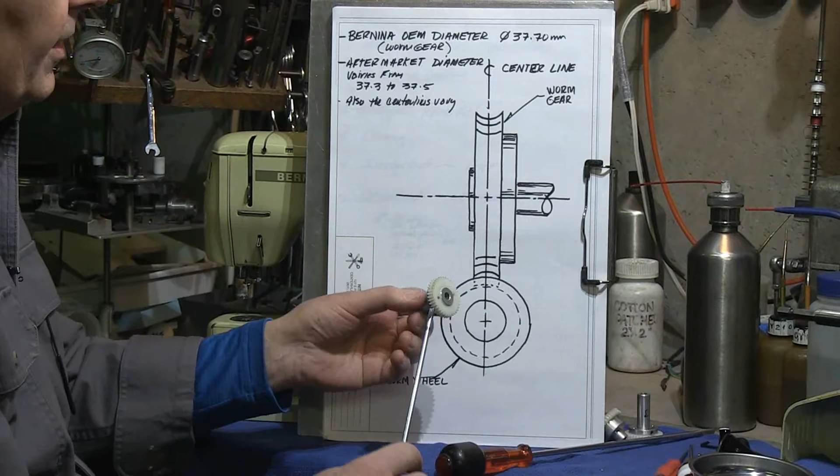Look at the actual measurement on this gear. If we were to take a caliper, a digital or a dial caliper, and measure from the inside radius of the profile on the cam, we're going to come up with a dimension. The dimension for a Bernina OEM diameter using a typical digital caliper, it's not a real accurate measure, but it's accurate enough, is going to show you that it's going to indicate 37.7 millimeters.

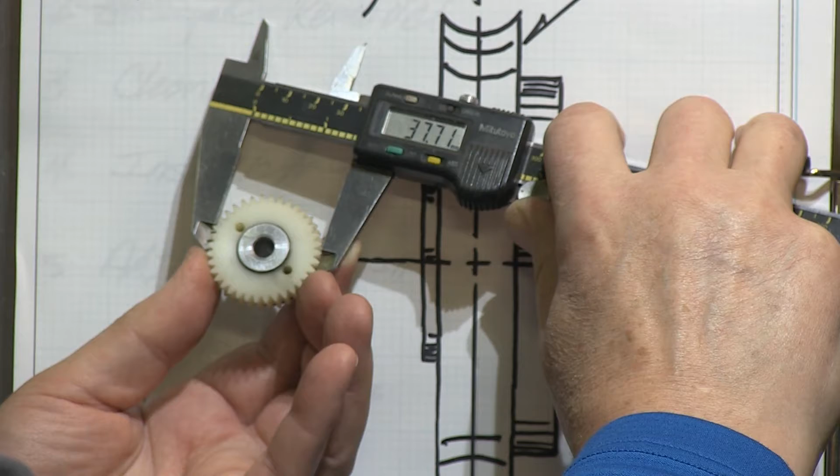If we were to look and measure at some of these other Camstacks, we're going to find that the dimensional measure from here to here is going to range from 37.3 to 37.5 millimeters. This means that when this Camstack is installed, that whole Camstack is going to roll a little bit left and a little bit right.

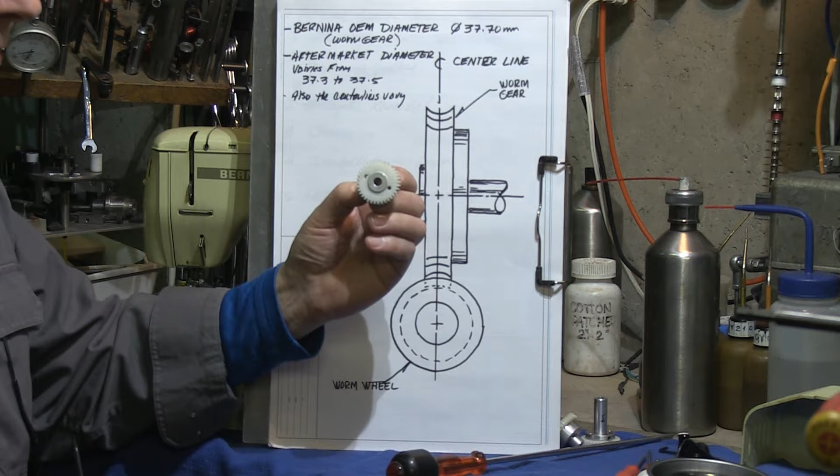The problem with that is that under normal running conditions, when the stylus is ascending the cam, there's a force in the opposite direction against that stylus, and then when that stylus starts to descend off of that lobe, that whole Camstack is going to jump, and then you're going to get a knock in the machine, and you're also going to get a glitch in the actual form of the automatic pattern.

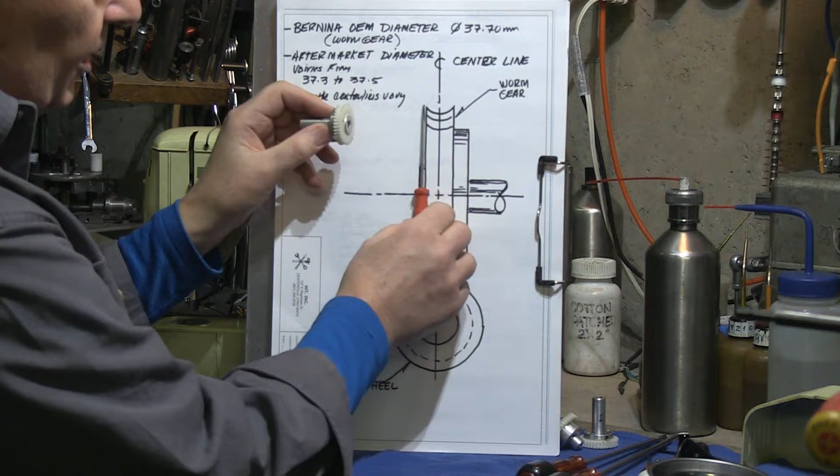Something to watch for as well is the actual profile right here of this Camstack gear. On a lot of the cams that I've seen, or a lot of the Camstack gears, I found that this profile is shifted to the left, which means that the gear is actually going to favor one side of the worm wheel. That can become an issue where that is very, very tight.

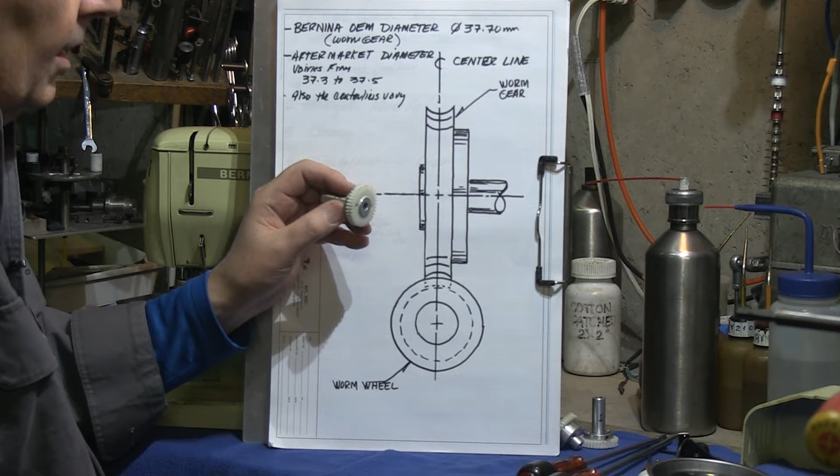I've seen the opposite, where that profile is shifted to the right, and then it can also become very, very tight. That isn't going to work. And one of the reasons it won't work is, of course, obviously, it's going to bind the machine. But sometimes if we have too small a diameter, when it's actually on center, then we actually have too much play, so the Camstack will not work well. It functions, but it won't work well.

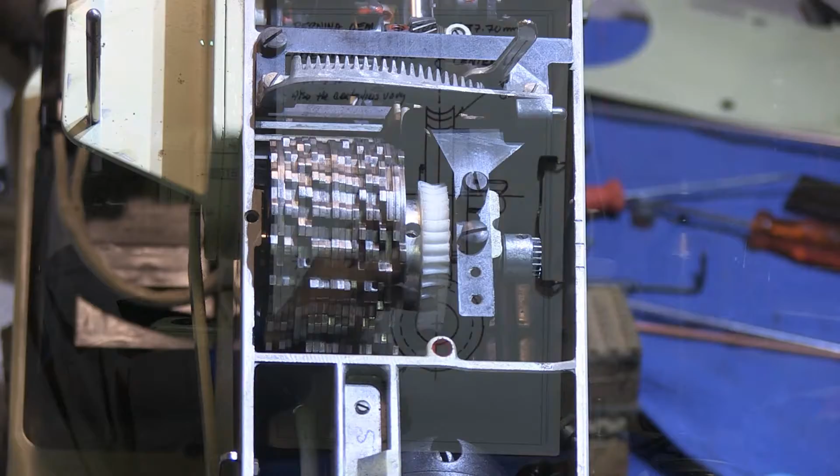To make this a little easier, I've already chipped away the gear on the Camstack, but to tell you how this works, I would simply, when you find the crack on this side, turn the hand wheel so the Camstack rolls to the opposite side where the crack is going to be, and it will always be where one of these holes lines up.

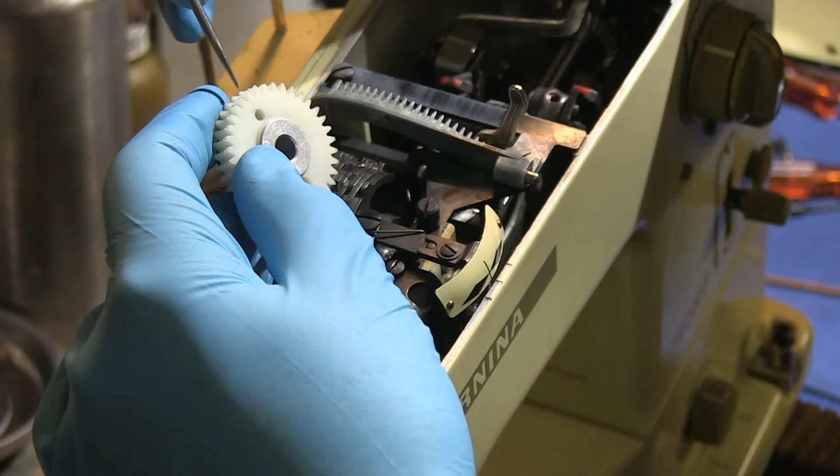Put a screwdriver in there and then just whack it lightly, and it will actually chip that gear apart. You remove both halves, and then the Camstack will be able to spin like this.

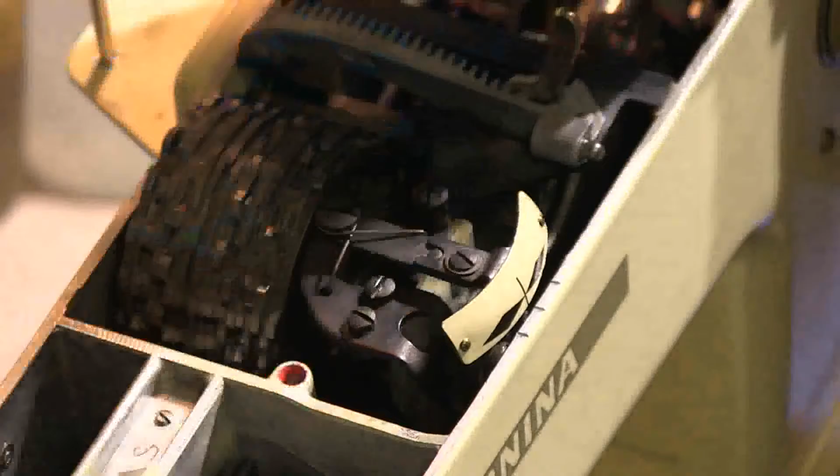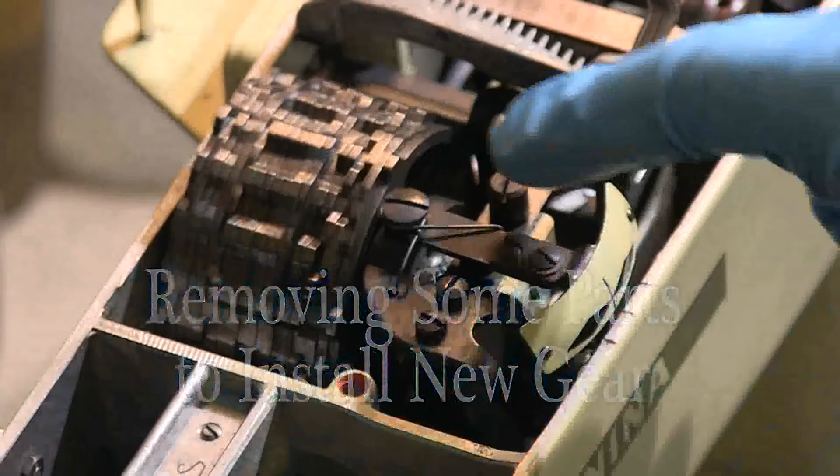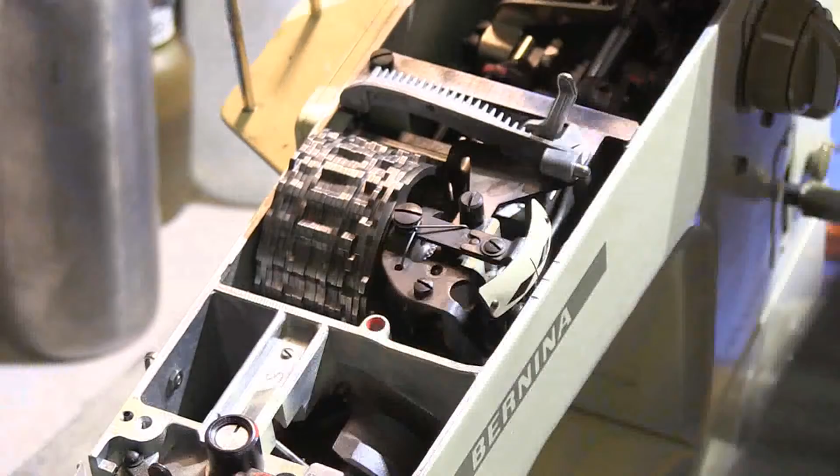Now, we're going to go ahead and start to remove parts, and we'll show you how to correctly do that without damaging the frame of the machine or the bearing post right here. So, we can loosen the two screws on the pattern indicator, remove those, and take the pattern indicator down.

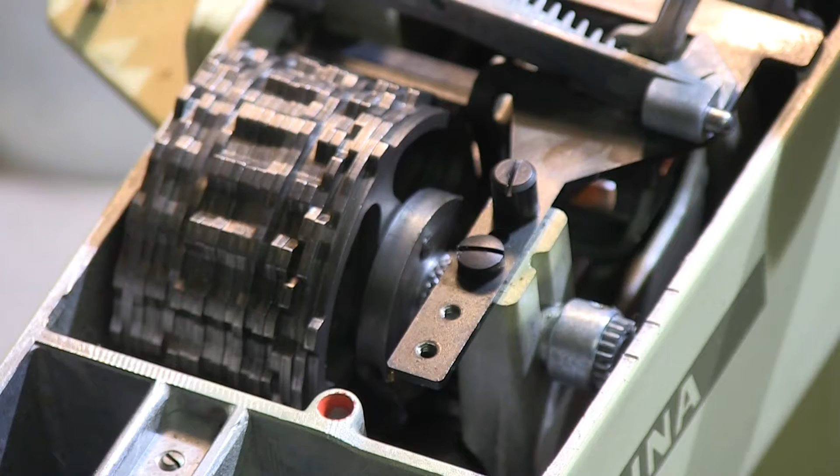Now, just to let you know, I usually use lacquer thinner to clean oil and so forth off screws. You do not want to take the pattern indicator and drop it in lacquer thinner. You won't have any paint left on that indicator at all.

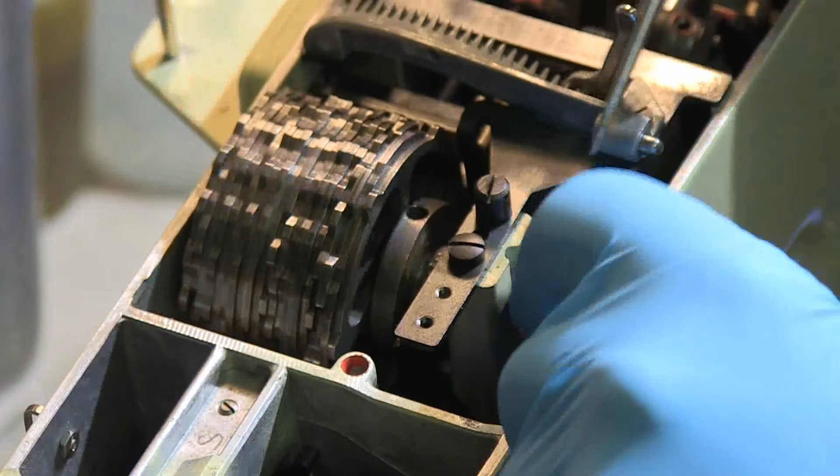Now, in order to remove the Camstack, the easiest way to do this, of course, is to take the screw in the Camstack. We want to loosen it. Then we'll go to the spur gear, and we'll loosen this gear here. We'll take the second screw and loosen it. And now we'll slide that gear out just a little ways, take one of the screws and screw it back in.

What you do not want to do is pry that axle out. By doing that, you can force the camstack over and it will jam in, especially if you left the gear in instead of slipping the gear out. If you left the gear in, it will wedge itself, and you can damage the frame by prying too hard. So what I do here is simply jam the camstack like this, and then we can push that camstack axle out, and remove the spur gear.

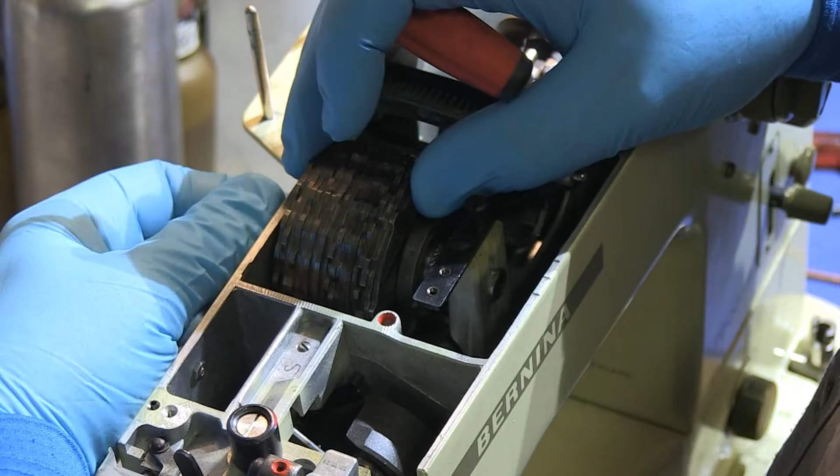We can move it further out. What we don't want to do is have the camstack slide axially back toward the back of the machine. Once that's done, we can wiggle the axle out. The axle is going to have a lot of oil varnish on it, so we'll want to remove that. Once we pull the axle out, we're going to want to clean it in lacquer thinner.

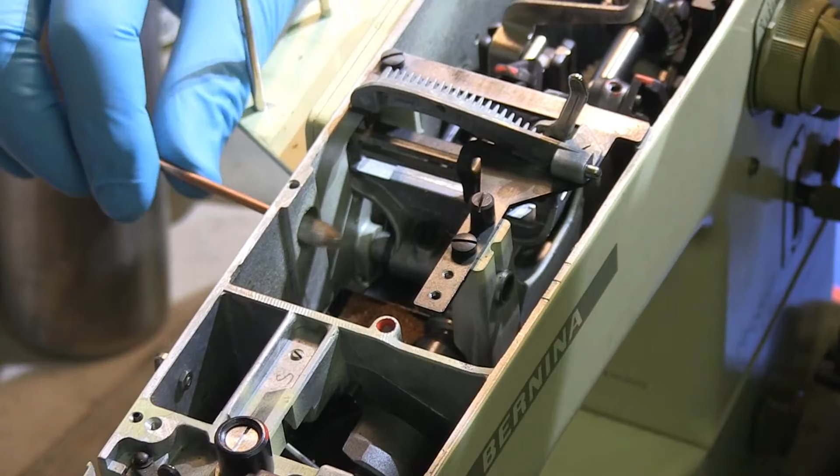We'll also want to take a moistened Q-tip. Here I've made some Q-tips on steel shafts, and we'll want to go in here and clean all the oil varnish out of the bore, the large bore, and then all the way through, and clean this bore.

Once that's done, we'll want to go into the machine, and you'll have an oil pad that at this point is going to be worthless because the foam is gone. What I'm going to do is remove that entire oil pad. It isn't necessary to have in there anyway. So that goes in the trash.

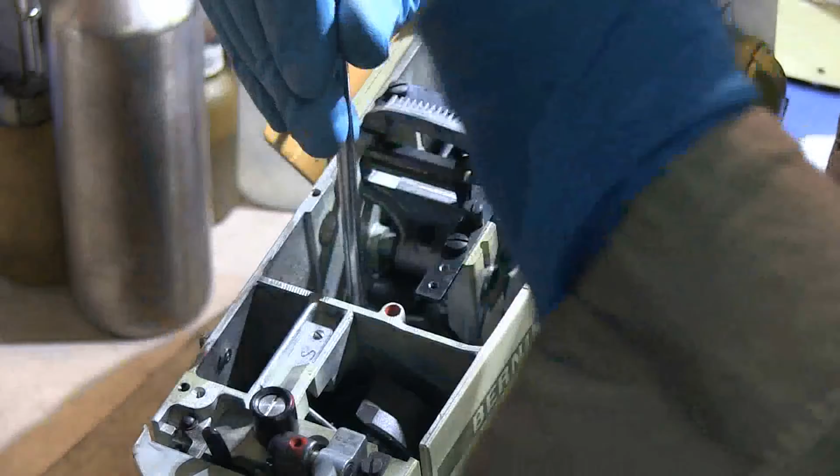Put the screw back in place. The reason I do that is you can have some oil collect in there, especially if the machine gets over-lubricated, and have it drip down underneath on the open arm. And we'll clean that out.

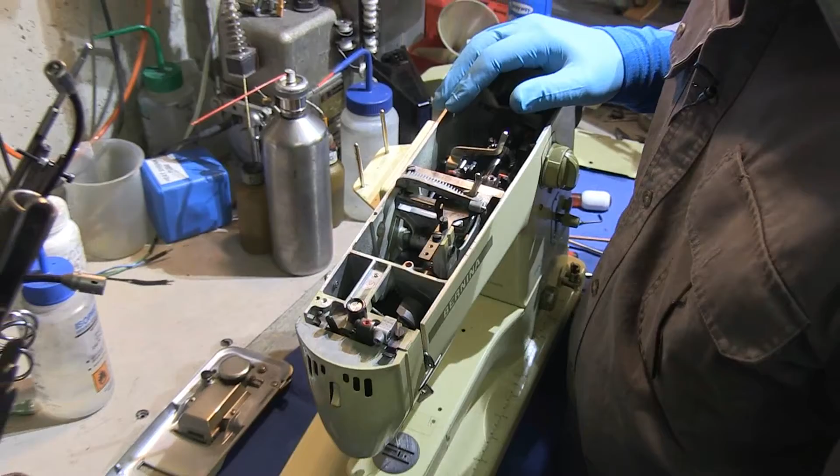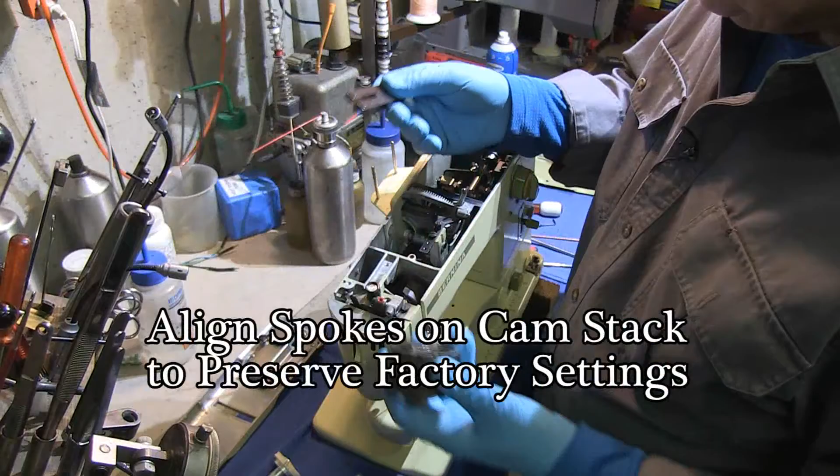Now we're going to change the cam on the camstack. We'll show how that is done using a vise, and also a special tool, which is a Bernina tool. What it does is align the spokes. So if you have this tool and you don't have a vise, use the tool. You can slide the tool down the spokes like this.

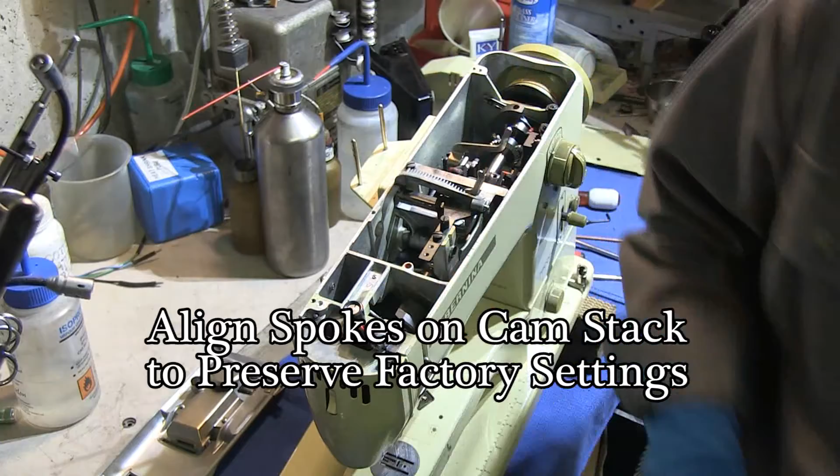In this case, it's a little tight, which tells me that maybe these screws have been loosened a little bit on the camstack itself. So we'll loosen those slightly, and then we'll force this down in.

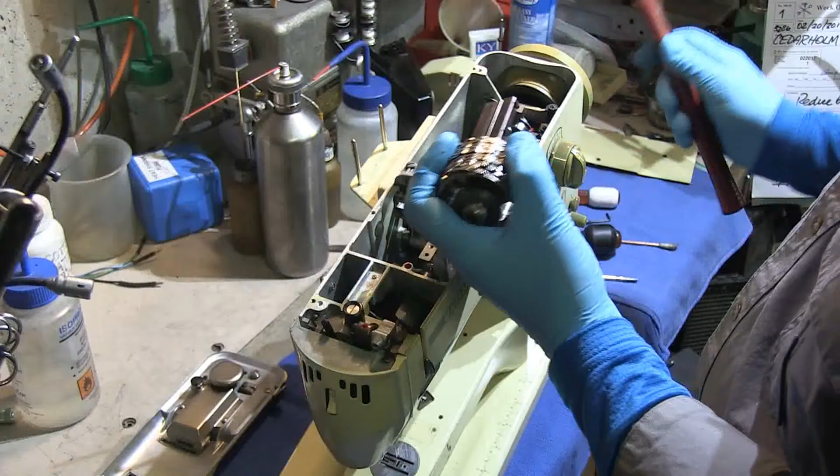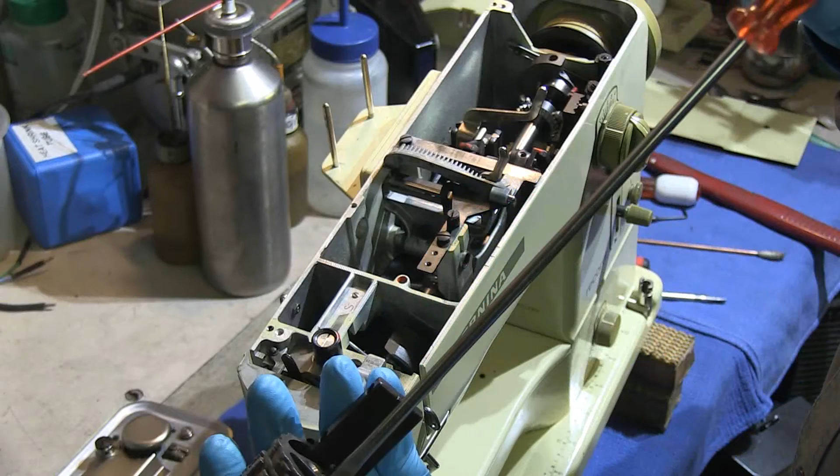At this point, we can remove the screws. And we could put a number 4 Maxbauman screwdriver in the old camstack, and we can then simply knock it out of place like this. My favorite thing to do, however, is not to do that at all. Because I have good vises in my shop, I use a vise to simply pinch the camstack tight. I can put this in there if I want, but I can pinch the camstack tight, remove the old camstack, and then put the new one in without ever having to worry about losing my factory settings on the camstack.

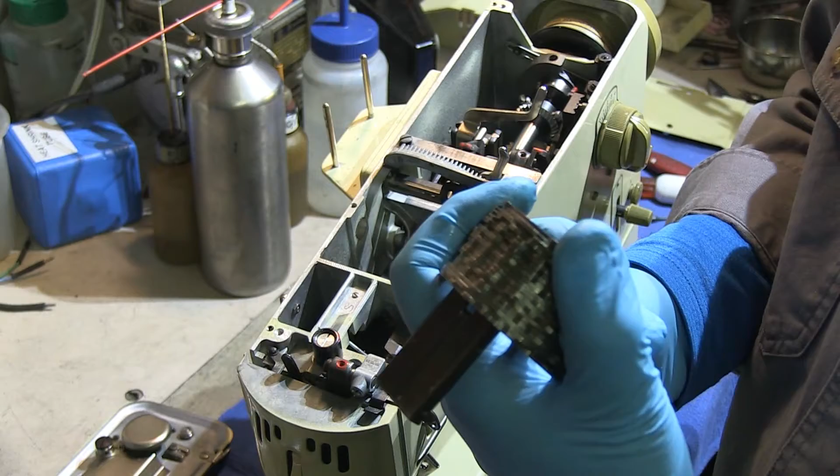It's important to note that these cams can be slightly rotated, and it will throw off the lateral movement, and you'll have a variance from one pattern to the next.

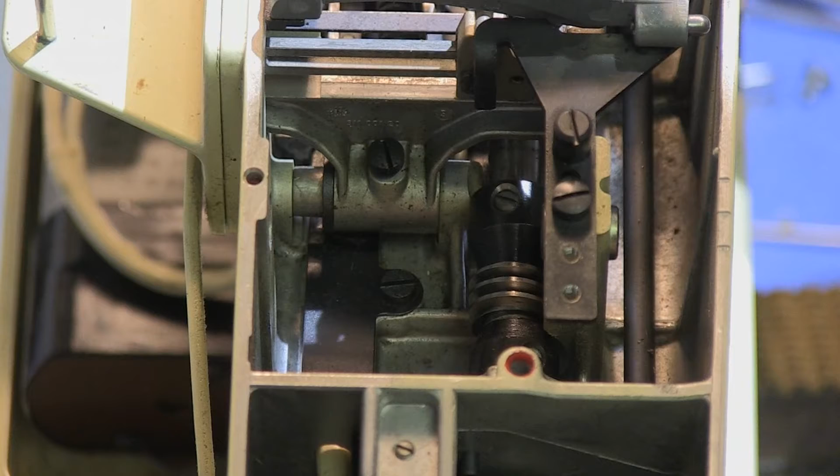The next thing we want to discuss is a problem with oil varnish in these older machines, because it's the biggest single problem we have with older Bernina machines. Machines that haven't been run for a long time because they had a broken camstack or a broken vertical shaft gear, like this one has, these machines can get stiffer and stiffer.

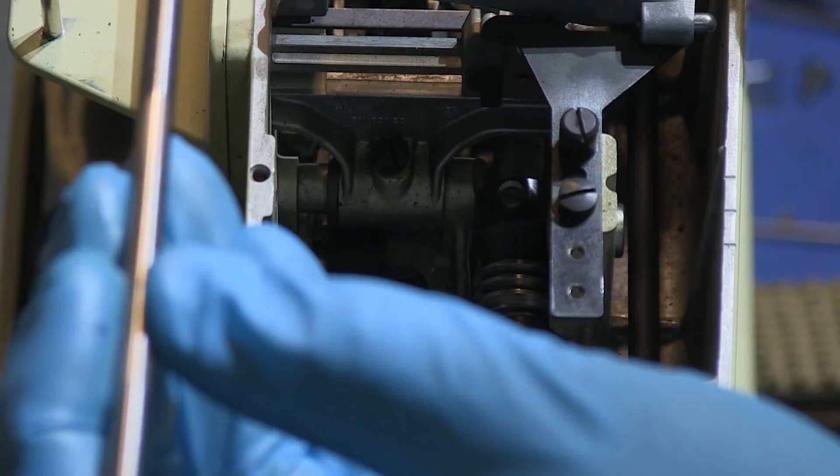What I've done is made a special tool with a 5mm screw thread on one side, and a very fine pitch 5mm on the other side, which is the same screw dimension as the worm wheel. What I'm going to do now is use a little bit of lacquer thinner. We'll put it in the hole.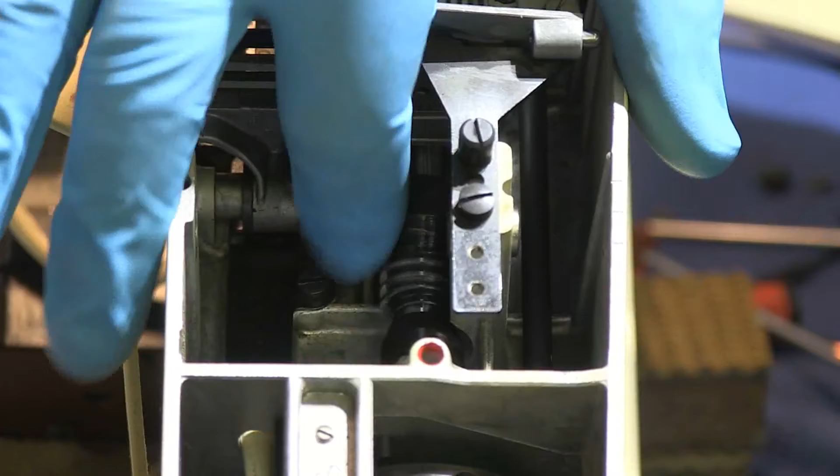I'll want to be able to roll that gear back and forth without any difficulty. Make sure I clean all the varnishes off so that it's just like a brand new machine. It will roll beautifully and I'll be able to make the adjustment easily.

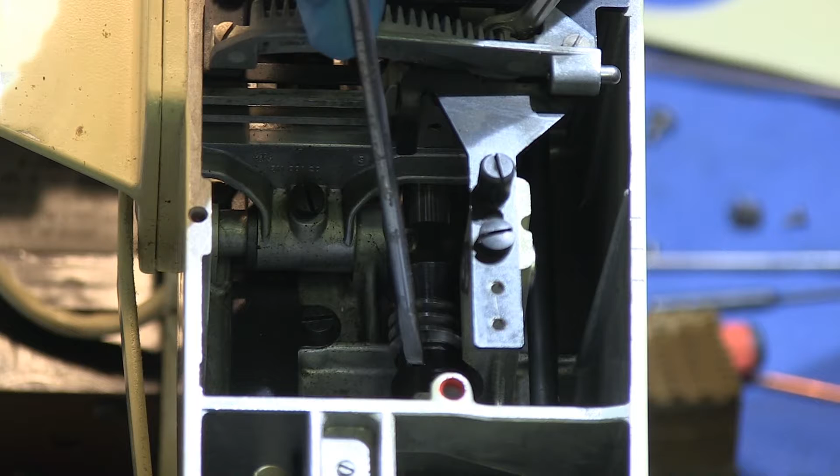Make sure that this gear has been slid all the way against the thrust collar. It's important that gear is against the thrust collar. That gives the worm screw the center line of this shaft. This thrust collar is made axially to a specific length to space that out so that the relationship of the worm wheel to the center line of the camstack is right on the money.

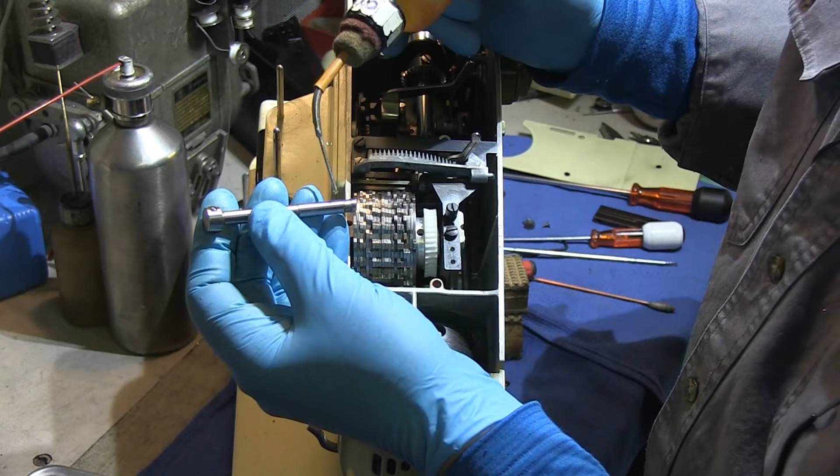Now we're going to install the camstack. Screw up, as mentioned, like so. We're going to take the axle and just lightly moisten it here, using Kluber UH168. All we want to do is put a very, very small coat of lubricant there.

We'll now install the camstack axle all the way through. Now when we push this all the way in, we know that this camstack, the gear itself, is now undersized because this is what we've measured. This is one of these.

Now watch how much play we've actually got here on that camstack. That's not really too bad. I'd prefer to have it tighter than that, but that's the way it is.

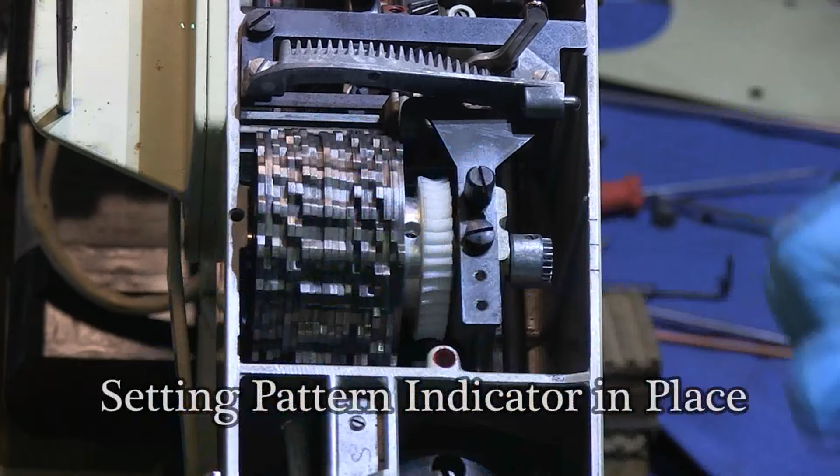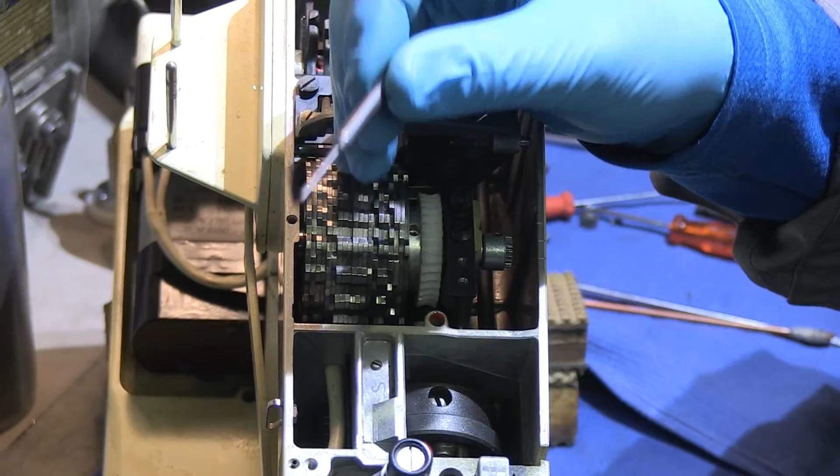Now that that's done, we're going to set the pattern indicator in place. For those of you who are Bernina dealers, you've probably wondered what this little tool was for. This is made just for the 730 machine, and on the late model 730s, from 1967 on, the camstack pattern indicator had a hole in the gear here, and it also had a hole through the frame. So what we can do is roll that gear and then install the tool, aligning the gear with the frame. It gives us a little handle to then set this device in place. We'll go ahead and set the screws on it.

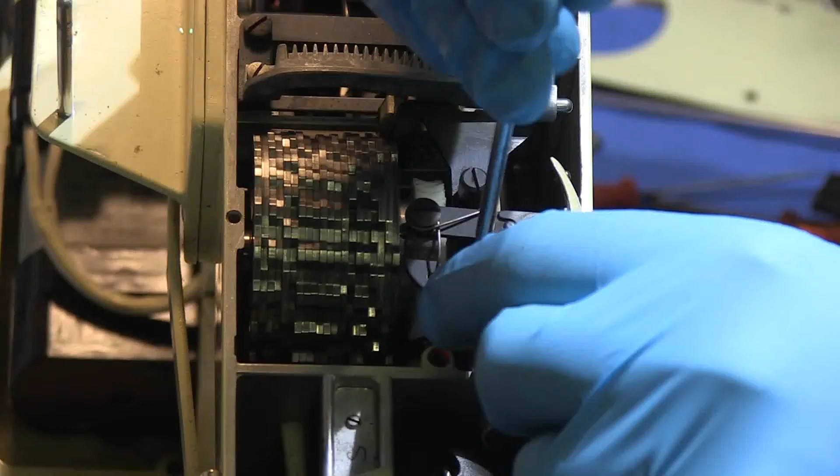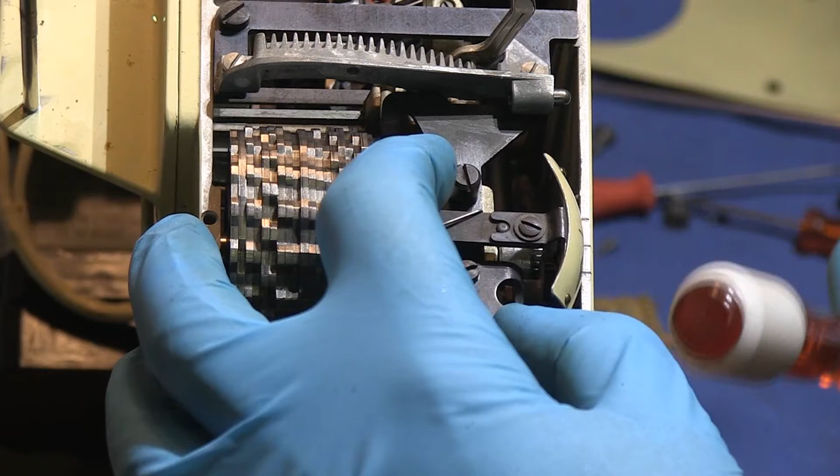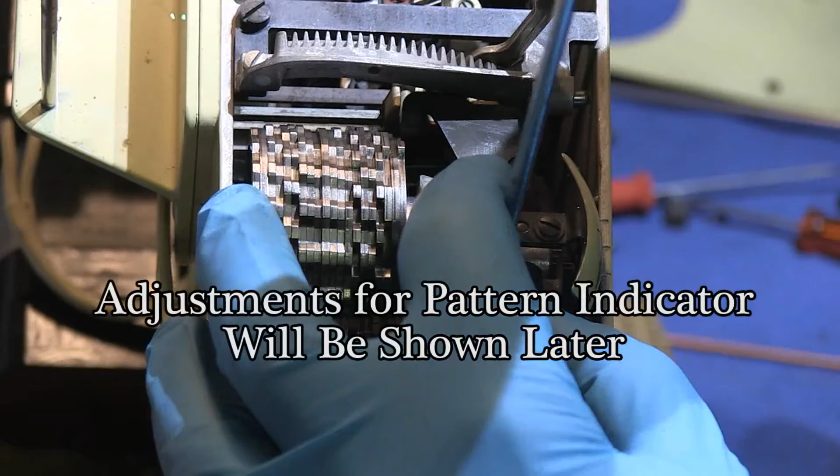When I set this in place, I want to make sure this indicator mount has the gears parallel and pushed in so that it's not real hard, but I don't want any play in them either. Set our screws, then remove the indicator tool. Don't worry about this right now, we'll adjust that later.

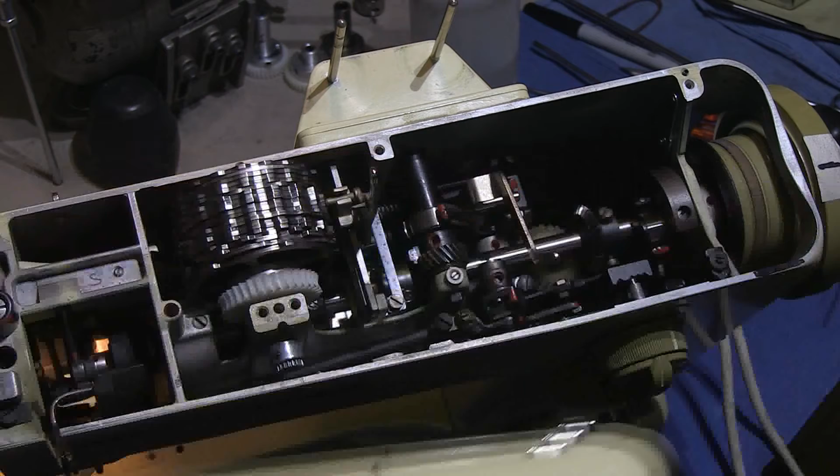What I've done now is selected the middle cam, about the middle - it's actually not quite at the middle. I'll show you the pattern I'm going to use. The pattern comes all the way down to the right side in the needle plate, and then the beginning of the pattern - this is where pattern indication comes in handy - is when the needle moves to the left side. So you can see here we're coming from the right side. Watch how that needle bar functions.

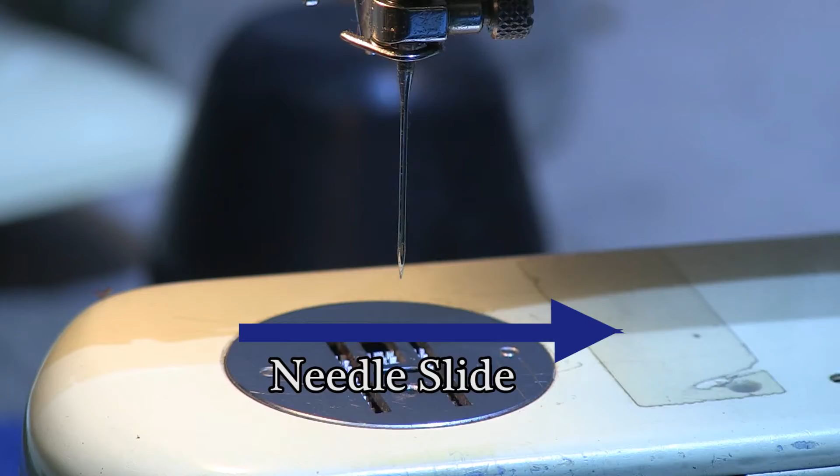If I turn it backwards, you can see how it's sliding this way. Okay, so we know the parabola is off. That is to say, the parabolic movement of the needle bar - instead of moving and changing at the top at the parabola - we are actually sliding sideways this way. We're going to stitch in and then slide back this way. So we want to time that so we have the correct parabolic movement.

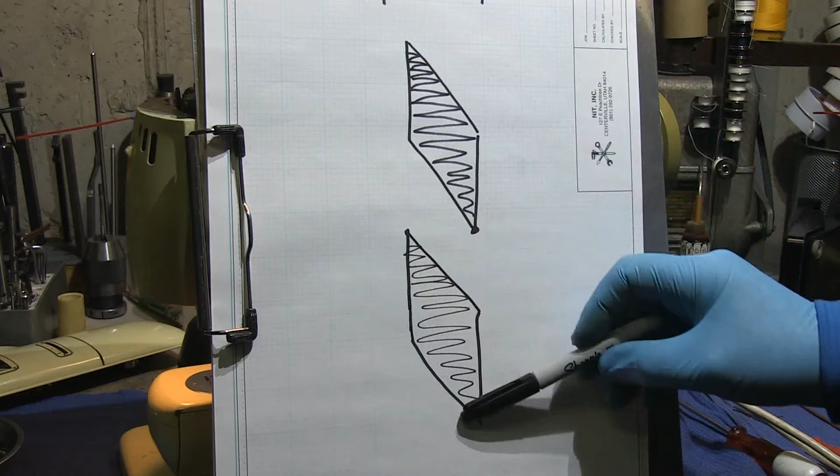Right here I'm using this particular pattern. We have 36 stitches per pattern, and we're going to start here, move to the right side of the needle plate, then the needle is going to jump over to the left side. This is where pattern indication begins. So what we want to do is check the stitch hole - I'm going to draw the stitch hole like this. So that's really what we're looking at.

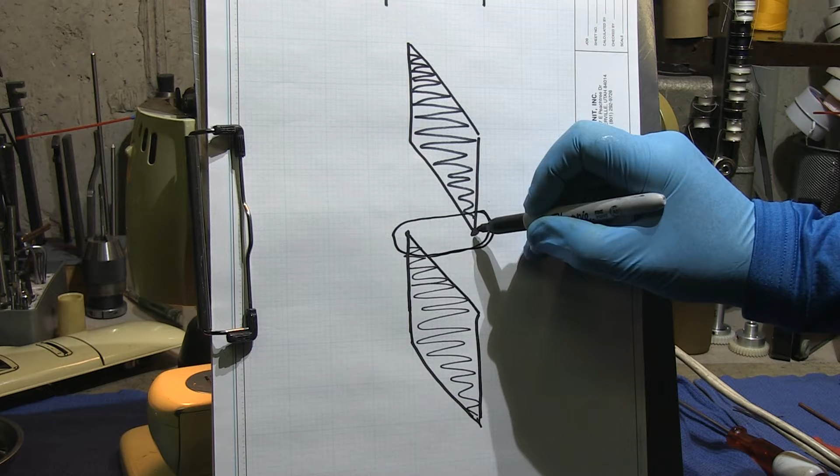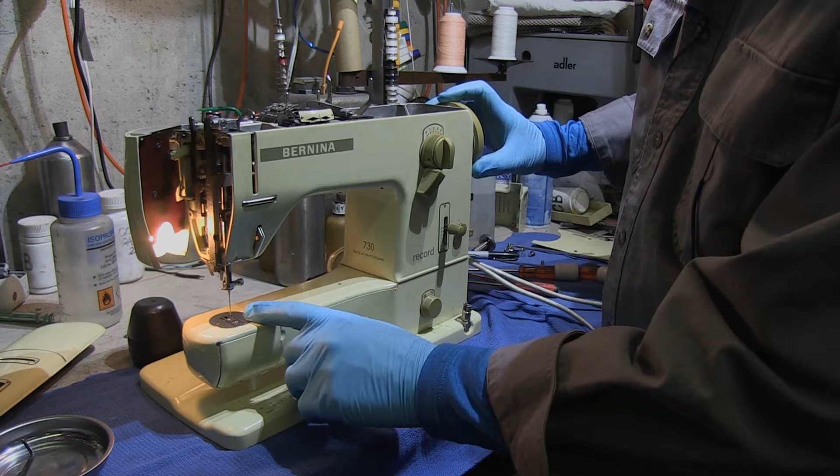We're going to adjust the machine so we have the correct parabola - direction changes like this and then down like this. We don't want the needle moving like this and having the parabola over here or over here. We want it centered. You can see where the needle is now changing from far right to far left. What we'll do now is back that needle up to the top here, top dead center. Make sure needle position is on center, and make sure stitch width is now at 0.

We're going to put our thumb on the needle bar screw, and we'll find the highest position of the needle bar. At this point, if it were set properly so the parabola was at top dead center, turning the stitch width here wouldn't cause any movement of the needle. But you can see how my needle is moving to the left.

So what I do is use the corner of the frame of the machine as a reference. You can also put a piece of tape and make a mark. I use my thumb in the corner of the frame, and as I move this back and forth, I can rotate in the direction of machine rotation, and you can see the movement gets worse. If we go back to the start point and rotate the opposite direction, all of a sudden the needle will almost stand still.

By loosening the set screw on the worm wheel, we can take the hand wheel and turn it back the same amount of distance from our check, then tighten the screw. And we're done. So now let's watch and see what it looks like.

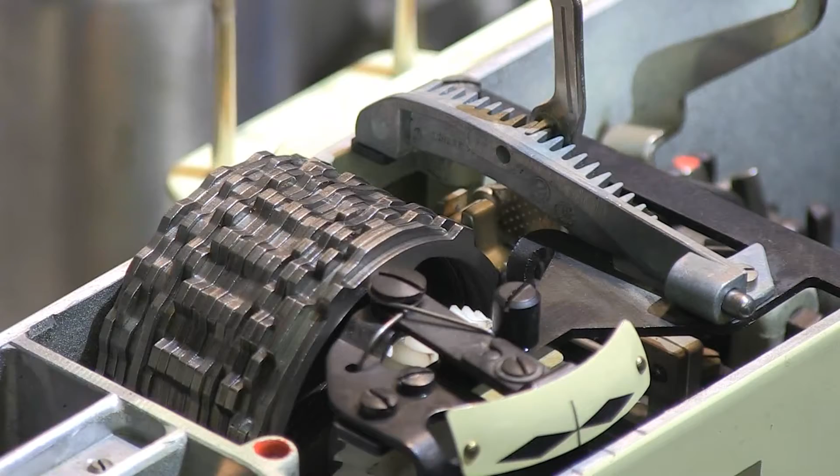Now watch what happens when I move the needle. See how the needle snaps here? If you look at the camstack, you'll also see the camstack jump. The reason it jumps is because the diameter of the gear is too small. That's the problem with this, and that's because there's too much play in this gear. The gear itself is defective, it's too small in diameter, and it makes a noise.

As you can see, it's important to make sure that you have a part that's going to work in the machine. The next thing we're going to do now is check to make sure that the parabola adjustment of the automatic device, the camstack, is synchronized with the zigzag parabola.

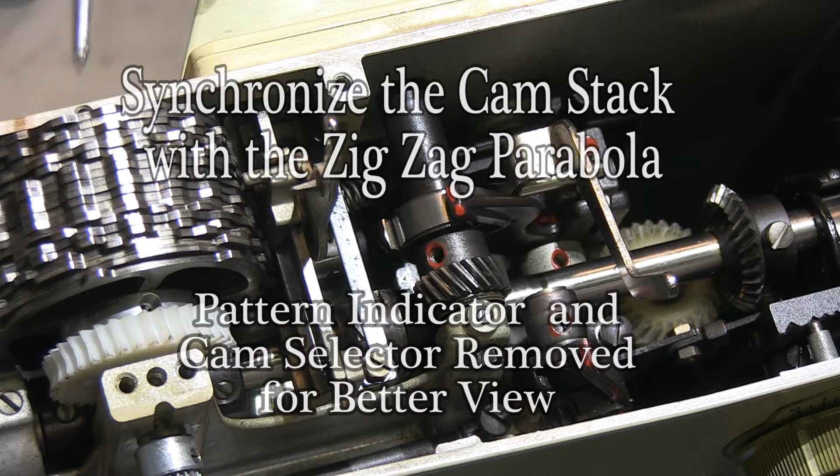It is possible between the two mechanisms to have the camstack out 180 degrees. Even though both parabolas are correct, they're not synchronized together.

When we look at how this works, on this side we have a transmission support that switches a switching pawl from the zigzag fork. When we switch it backwards, it switches into the automatic fork. Now if we put this into neutral position, you're going to see the needle bar. When we turn the stitch width up, we see the switching pawl in neutral, and we can see how the zigzag mechanism is constant and always moving.

We can also see that if I pull the cam lever back, the automatic fork moves independently. In this case, this cam is actually 180 degrees out, so here's the problem. So when we run the machine, watch the two forks.

Now here I've selected a cam that gives me a symmetric pattern back and forth like zigzag, and it'll diminish down to straight stitch. As you can see, it stalls here, then steps back up, but you can see how these are moving opposite. The problem is that when we stop sewing like this...

It is possible that these are misaligned so that when we switch this back, the switching pawl won't immediately go in. On some machines, this will actually stick and won't go in. The next thing you know, a customer complains and says something's defective with the machine. So it's important that these are synchronized.

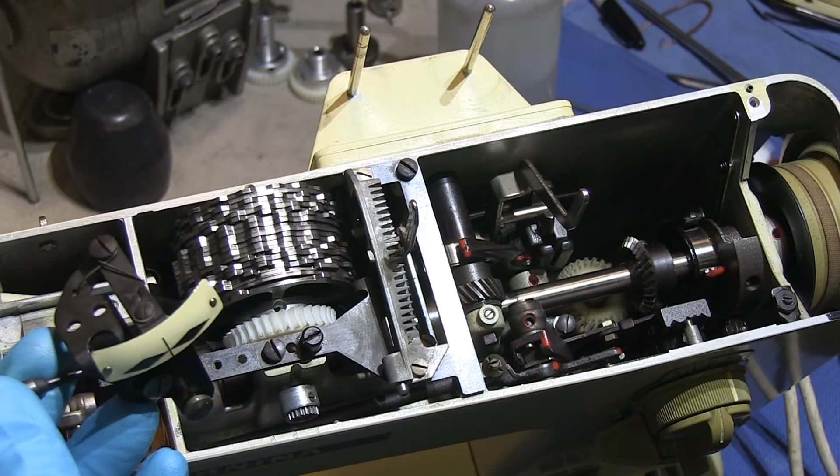The last thing we're going to do now is reinstall the pattern indicator. We removed it earlier to show you how the parallel adjustment was done on the worm gear, on the worm wheel. But now we're going to go ahead and time the pattern indicator. Most of the time when people put a Camstack in, they give no thought to the pattern indicator - they just assume it's going to be in time, and it's not. We'll show you how to do this right now.

So here we're using the adjustment tool again, or the setting tool. We're going to place this in place and put our screws in place.

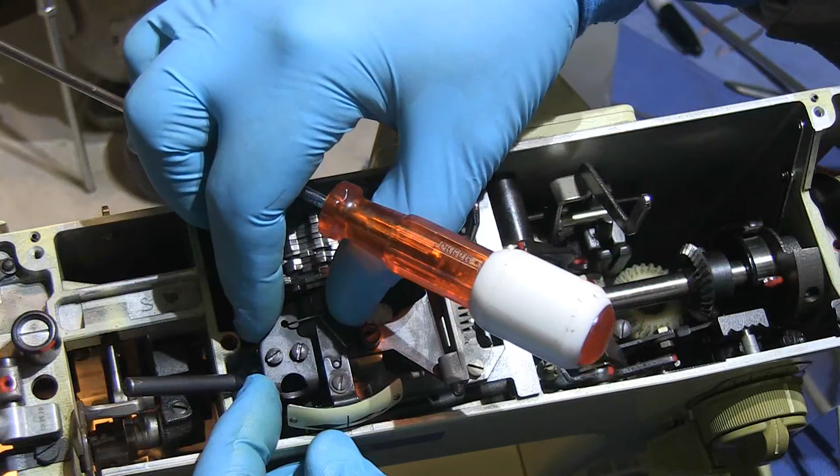Like so. We want to make sure that the indicator is adjusted so that the gears, again, are parallel. We want to make sure that we don't have play existing between the two spur gears. We'll go ahead and set the pattern indicator here and here. And I can wiggle the gear, and I don't see that I have any play.

A lot of people think that putting this in, they're finished. But let me show you why we're not finished. So we can then remove the pattern indicator. See how much play there is in this gear?

Now, in order to adjust the gear, we have set one screw at roughly 2 o'clock here, on the adjustment at the end of the Camstack axle. What we're going to do is have our needle set so that the lateral swing comes to the first stitch on the left side, because that's where pattern indication begins, as mentioned previously.

And now we can run the machine, and we can mark, if we want to, where that pattern indicator mark is. Don't move the pattern indicator, just mark it with a pencil. In this case, we're just barely to the left side of the frame mark. There are actually 3 marks on the frame here.

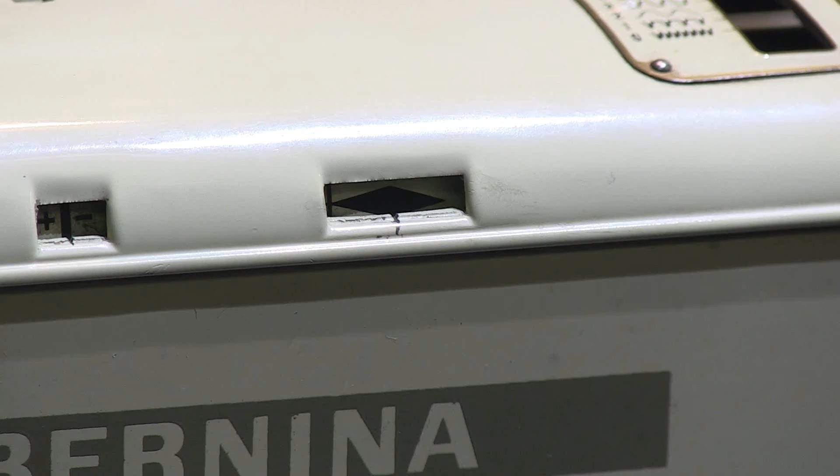As we run the machine, you'll be able to see how the cam makes its pattern form, and then it moves to the right. Then as it stitches the last stitch on the right side, the needle will swing to the left. The point of the needle should be flush with the needle plate. At that point, we want that pattern indicator to be on the mark.

You cannot just move the indicator onto the mark, because you can see here that when we run it again, the pattern indicator will swing to the left side and come back. It'll be on the mark, and now it'll swing to the right side.

Okay, now we've made the worm gear, the spur gear adjustment. We can do another 36 stitches.

Okay, we're set perfect. This concludes the installation of a worm gear on a Bernina 730 with its associated adjustments. Thanks for being with us. We'll see you next time.